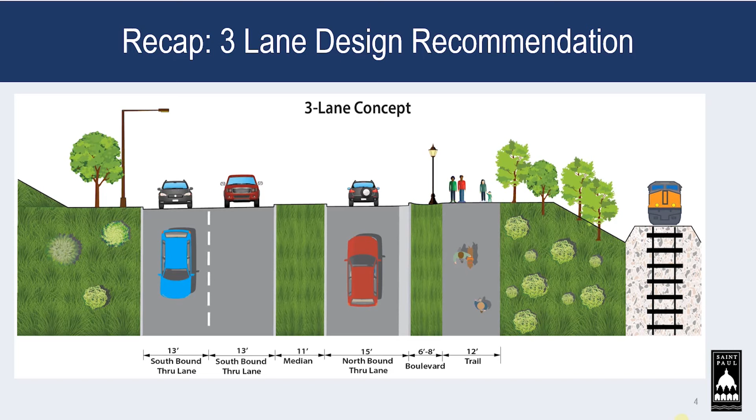So again, here is some information about why we recommended the 3-lane design. The estimated cost for the project is $7.5 million. And one of the reasons we recommended it was because it was a lot less expensive than the 2-lane configuration. The other reasons: 2 southbound and 1 northbound lane. We didn't want to impact the southbound lanes because that is where all the off and on ramps are. We would have had to rework all of those, and that would have driven the cost up on the project.

The 3-lane also offered us significant safety improvements, whereby we were able to keep the median in place between the southbound and northbound vehicles, and that of course then reduces the potential for head-on vehicle crashes. And lastly, the safety was prioritized for our pedestrians and bikes and vehicles at all access points. We were able to do that with the 3-lane design. The northbound lane access is maintained, as is the trail access that was added at the ramp intersections, which we'll review in the next couple of slides.

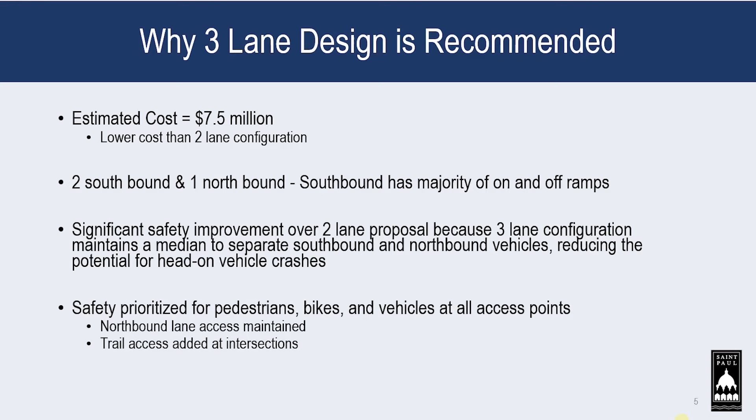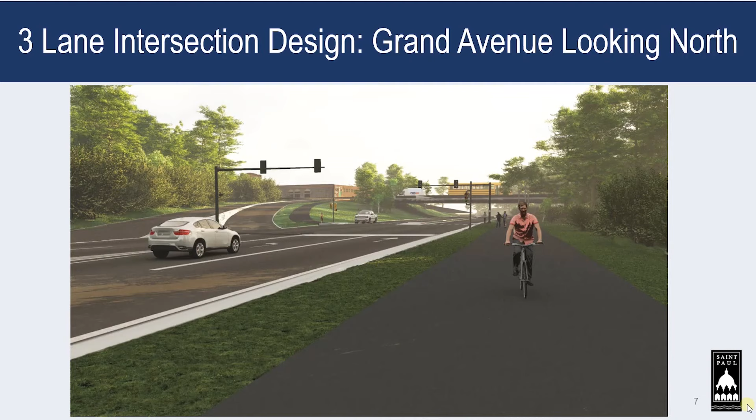All of the pedestrian and bike crossings will be on the north side of the intersections, and they will be protected as they are crossing at signalized intersections. So I hope explaining these design features eases people's concerns about how Ayd Mill Road will operate, especially at the ramp locations. We have the left turners covered, as well as getting the pedestrians and bikes across Ayd Mill to the trail facilities safely.

Another concern that we heard a lot about is the intersection or the ramps at Jefferson on the south end. So here is another rendering that shows the proposed improvements at the Jefferson ramps. Again, I think there was some confusion on how they might work. So the current northbound Ayd Mill on-ramp for westbound Jefferson traffic will be eliminated, and then that will be converted to a pedestrian and bicycle trail and tied directly into the trail along the east side of Ayd Mill Road.

This means that westbound Jefferson traffic then will have to use the loop road ramp access in order to go northbound on Ayd Mill Road, just like the eastbound Jefferson traffic does today. So bicyclists using the Jefferson Avenue bike lanes will be able to directly access the new trail facility along Ayd Mill Road.

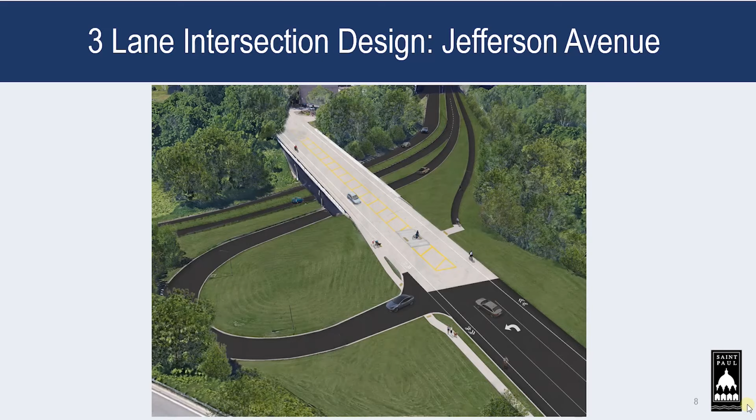So getting into a little bit of the summary of the feedback we heard from the first presentation, the overall numbers, we had 1,778 views of that presentation, and we had 1,138 responses to our survey. And in terms of people who responded, 88% of those we heard from live within the city of St. Paul, and 12% live from outside the city. We know that because we required each respondent to put in their zip code for us.

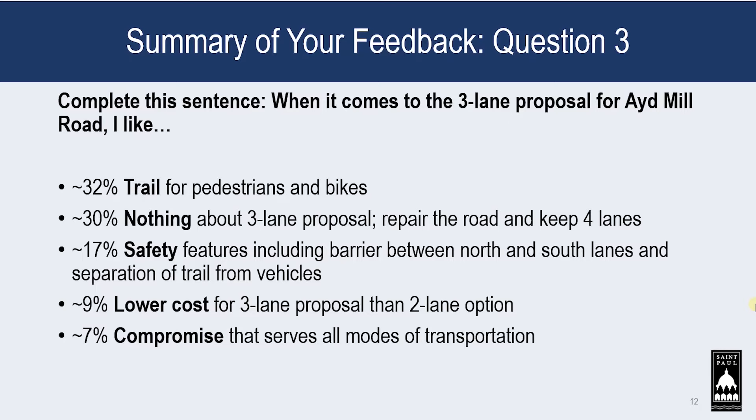17% said safety features, including the barrier between northbound and southbound lanes and the separation of the trail from the vehicles, is something they really liked. 9% liked the lower cost of the 3-lane proposal versus the 2-lane option. And then 7% thought this was a great compromise and that it serves all modes of transportation.

So our fourth question, complete this sentence for us. When it comes to the 3-lane proposal for Ayd Mill Road, I am concerned about. 21% are concerned about increased traffic congestion on Ayd Mill Road, especially if we drop the northbound direction down to 1 lane. They're also concerned about increased traffic on area streets. 13% are concerned about spending money on Ayd Mill Road versus other streets or city priorities. 21% are concerned about safety, including the speed of traffic, space barriers between the trail and the vehicles.

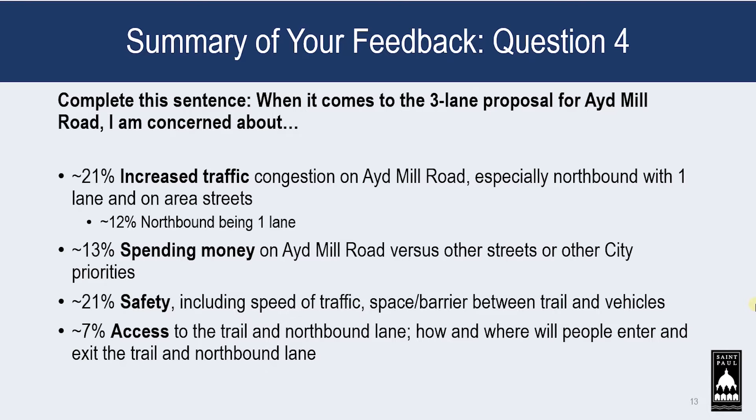And then 7% access to the trail in northbound lane were a concern for folks, and how and where people will enter and exit the trail in the northbound lane. And we showed that back on the slide, the rendering at the Grand ramp to Ayd Mill Road. We showed how that access will be accommodated for all three ramp locations, St. Clair, Grand, and up at Ashland.

And finally, we asked, my questions about the three-lane proposal for Ayd Mill Road are, and these are what people responded. They want to know, how will the proposed plan affect neighborhood traffic? And we'll hear that shortly when Randy gets to his part of the presentation. What are the specific on and off vehicle, bike, pedestrian facilities, especially at Selby? So we showed you at Jefferson how the bikes will get on to the ped bike trail. We showed you at Grand how they'll get on. That will be the case at St. Clair as well as at Ashland.

What we didn't show is up at Selby, and that's because there are no, I should say, bike facilities up on Selby. We recognize that when bicyclists get to the north end at Selby, we're going to kind of drop them off and they're going to be on their own. That's all part of building out a bicycle network. We can't do it all at once. We recognize we have to do it in pieces and parts. And this is the opportunity where we can get 1.5 miles of multi-use trail along the Ayd Mill corridor, and we want to take advantage of being able to do that now, recognizing that it isn't always connected to other things at this point.

That will have to be considered in the future. Other things people were questioning is, why is there not a direct link to I-94? Why wasn't the original plan for the I-35E to I-94 route implemented? And then you look at the next question, why wasn't this road maintained, redone a long time ago? The answers to that we kind of covered in the first presentation. There's really two answers to it. One is people couldn't agree. We couldn't reach a consensus on what the right thing to do was as far as connecting to the north end. And then, of course, there's a huge cost to connecting Ayd Mill Road on the north end.

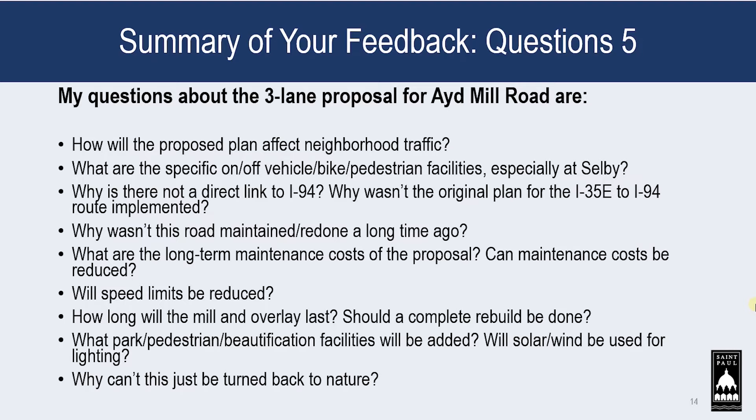And why can't this just be turned back to nature? I think about our first presentation and the fact that we've got 27,500 vehicles on an average day on the south end of the facility. If this were not a roadway, the question would be, where are all 27,500 vehicles? Where would they all go? So it's a pretty significant roadway in terms of the traffic it carries, so we think it's important that it remain in place.

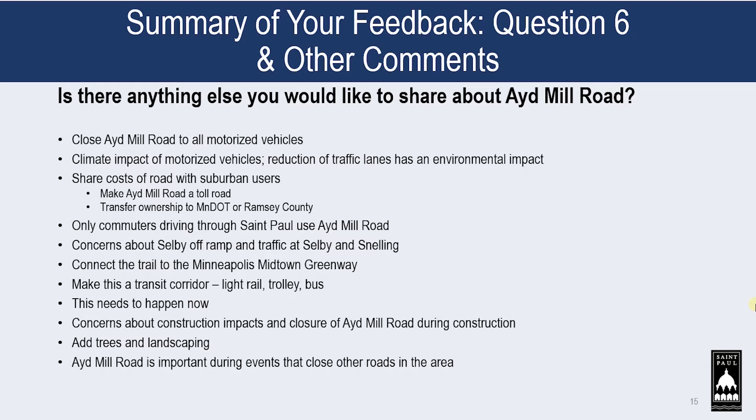Add trees and landscaping. Again, that's not part of this project, but that can all be done at a later date. And Ayd Mill Road is an important roadway during events that close other roads in the area. And again, as you will see, we did a little investigation about that, and Randy will go through game day traffic when he does his part of the presentation. So now I will turn it over to Randy to present the results of the traffic modeling and mitigation strategies for our proposed 3-lane configuration.

Thank you, Paul. This is Randy Newton, the city's traffic engineer. I'm here to talk about the traffic modeling that we completed for Ayd Mill Road. The 4 basic components that we worked on were the traffic operations in the existing and proposed condition, the travel patterns and traffic diversion, the event traffic associated with Allianz Field, and lastly, our proposed mitigation strategies. The first slide here is our traffic operations, and before I get into the traffic operations, I do want to mention that our vehicle data was collected in May and September of 2019. And secondly, as there are no pedestrians or bicycles currently using Ayd Mill Road, we had to estimate that usage, and we estimated that based on counts that were available to us on Shepard Road in 2018.

Looking at the northbound operations, I first point you to the northbound capacity line. This is an estimated capacity line for existing conditions. The second thing I point out is that the volume graph of the AM peak hour shows that it is under the capacity of the roadway. You can also see that in the PM peak hour the volume of the roadway is under the existing capacity. That's also consistent throughout the day, where the volumes are less than the northbound capacity of the roadway. In addition, all the traffic signals along Ayd Mill Road have acceptable capacity and work well throughout the day. We do note, however, that there is often congestion downstream, north of the Ayd Mill corridor, on Snelling Avenue that does create congestion in the area.

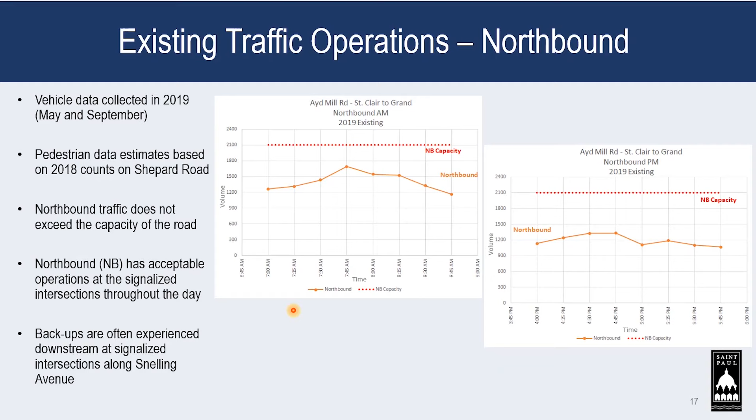Moving on, this graph is our existing operations for southbound. Again, this is our line for southbound capacity. This line is a little bit less than our northbound capacity due to the left turns and the impact the left turn traffic has on the southbound capacity. Again, you can see that our southbound volumes in both the AM and PM peak hours are less than our capacity. Again, we do note that there is some congestion experienced in the corridor. First, at times during the PM rush hour, there can be some backups with traffic entering 35E. And like northbound, there are backups experienced in the Snelling corridor upstream of Ayd Mill Road.

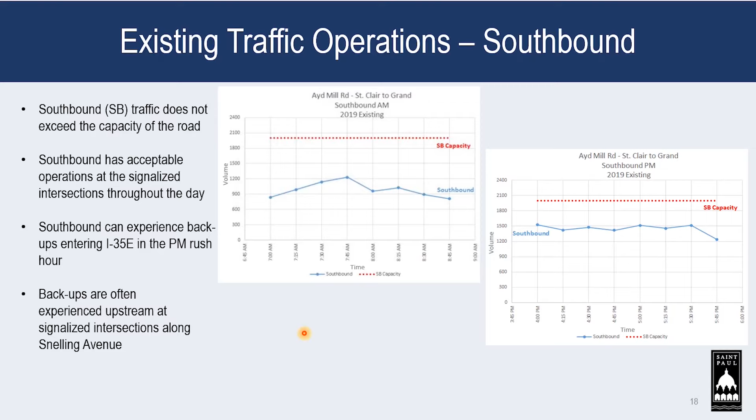Moving on to proposed operations. First, you can see that our northbound capacity line has now been decreased from existing conditions, and that is due to the proposal where we're taking the 2 northbound lanes down to one lane of traffic. With that, demand is expected to exceed the northbound capacity of the roadway in the proposed condition. Primarily where this will be seen is on the northbound approach to St. Clair, and it's expected to be primarily limited to the AM rush hour. Looking at PM, we approach the capacity of the roadway in the PM peak hour, but essentially we have the capacity to handle the traffic we expect to see. And again, the other parts of the day have lower volume than the graph shown here. So really the time frame that we expect to see some congestion northbound is limited to the AM peak hour.

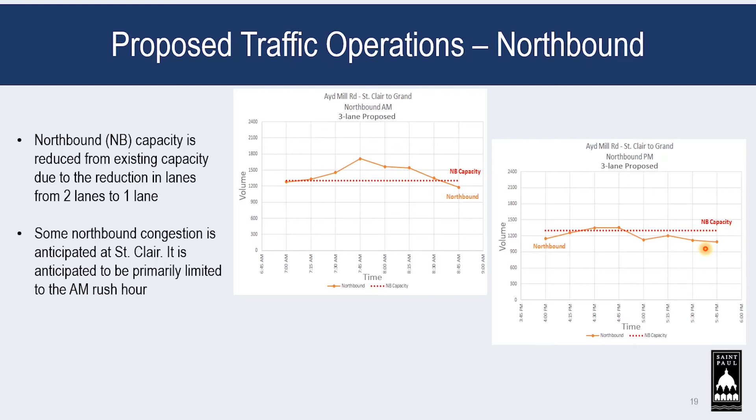The next graphs look at our southbound traffic operations. And again, our southbound capacity line has been reduced from existing conditions. The primary reason for this is the addition of our pedestrians and bicycles and the crossings that they will make of the roadway. Every time a pedestrian or bicycle crosses the roadway, that takes away green time that would otherwise be utilized for that southbound traffic, and that is why we see that reduction delay.

For the AM peak hour, our volumes stay substantially lower than our capacity. In the PM, the volumes that we see on the corridor approach the capacity line that we expect to have in the build condition.

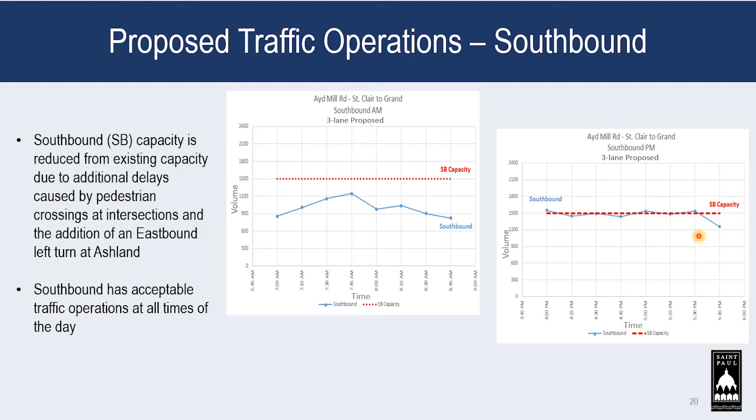The next piece of our analysis was looking at our travel pattern data for Ayd Mill Road and where we'd expect diverted traffic to go. This analysis was based on data that was collected in 2018, and this is travel information data that was available to us. In addition, we utilized the Met Council's travel demand model as a tool to help us do this evaluation.

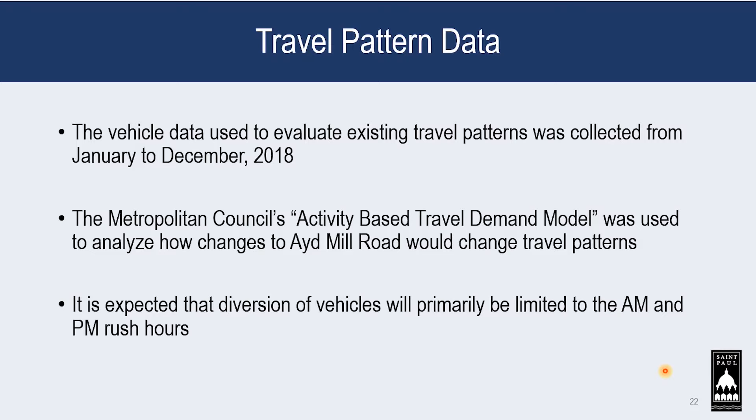And just to reiterate, based on the previous slides, we are primarily expecting diversion of northbound traffic in the AM rush hour and diversion of some southbound traffic in the PM rush hour. There may be some minor diversion throughout the other parts of the day, but we expect it to be pretty limited in scope.

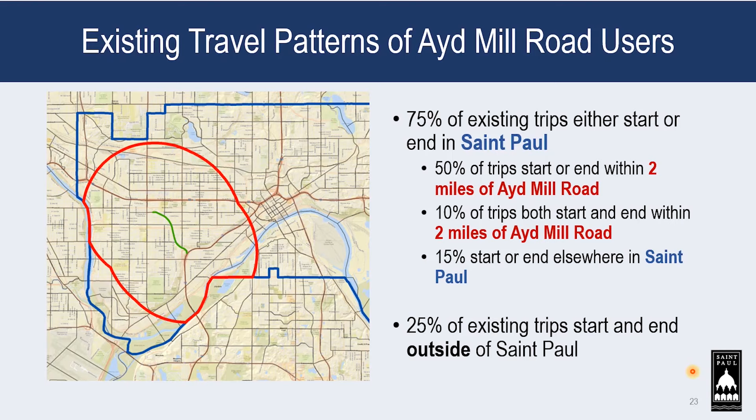This first graphic shows the existing use of Ayd Mill Road, and a couple key takeaways from this slide. First is 75% of the trips utilizing Ayd Mill Road either have an origin or destination in St. Paul. Breaking that down a little bit farther, 50% of those trips have an origin or destination within 2 miles of Ayd Mill Road. And 10% of those trips have both an origin and destination within 2 miles of Ayd Mill Road. Lastly, 25% of the trips start and end outside of St. Paul. We would associate this as being the regional traffic that is utilizing Ayd Mill Road.

So this first graphic shows our expected diversion patterns in the AM peak hour. As I shared before, we expect maybe up to 400 trips being diverted in the AM rush hour. The thick red line shows the reduction in traffic on Ayd Mill Road associated with that diversion, and the green lines show where we expect that traffic to go. The thicker the green line, the bigger the volume.

As you can see here, both Hamline and Lexington are expected to see approximately 100 to 150 vehicle increase in the AM peak hour as a result of our proposed changes. We also note that we expect about 100 vehicles to divert completely outside of our study area. One route that they may take is Highway 55 through Minneapolis.

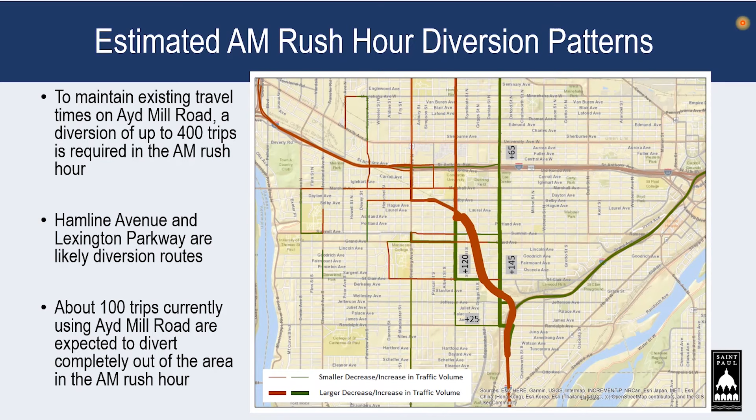In the PM, the volumes that we expected for diversion are less, but the story is relatively the same as the previous slide. Our thick red line shows the reduction in traffic on Ayd Mill Road, and the green lines show the amount of diversion we expect on the surrounding roadways. Similar to northbound, the primary corridors are Hamline and Lexington. We also see Summit as a little bit higher volume on this slide.

And due to the amount of trips diverted in the PM peak hour, these diversion routes are probably expected to see approximately 50 to 100 increase in traffic during the PM peak hour. Also, as with the AM, we expect about 50 trips that will be completely diverted outside of our study area.

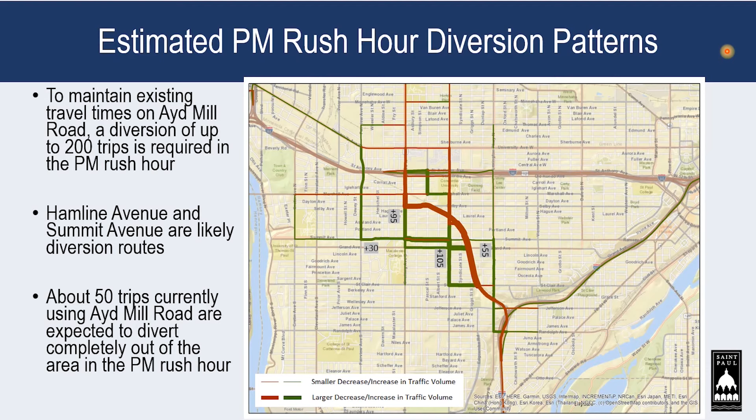This next slide just summarizes the daily change in traffic volumes between our existing and proposed conditions. What you'll see here is very minor changes in the actual daily traffic diversion. And again, that is due to our expected diversion primarily occurring in the AM and PM rush hour and not throughout the day.